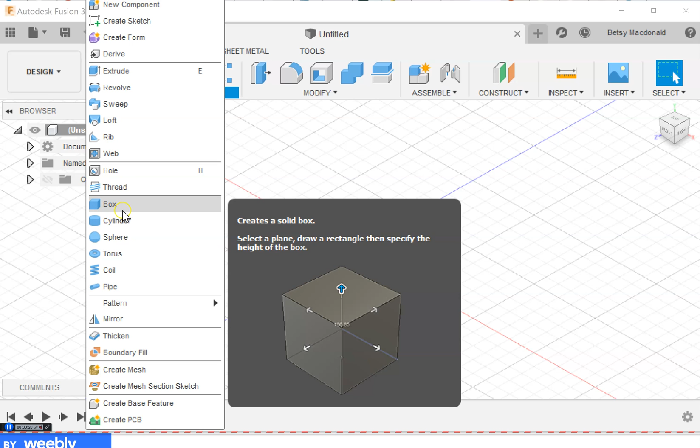Hi, this video is about using the sketch technique in Fusion 360. Sketching allows you to draw lines, arcs, and basic two-dimensional shapes that can then be extruded or pulled into a 3D object.

It differs from the primitives you can make, which is more of a two-step click to creating some basic 3D shapes. In order to use sketches, the sketch mode, you have to create a sketch.

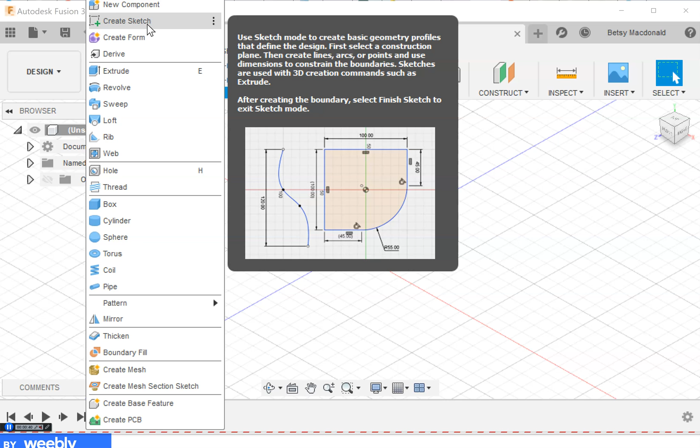This is the quickest way to do it, if you have this create sketch icon. If for some reason that doesn't appear, it's also available under the sketch menu, create menu. I'm going to go back and click this.

As soon as I say I want to create a sketch, it wants to know which plane I'm going to put the sketch on. I typically choose the floor, but it's not all that important in most cases.

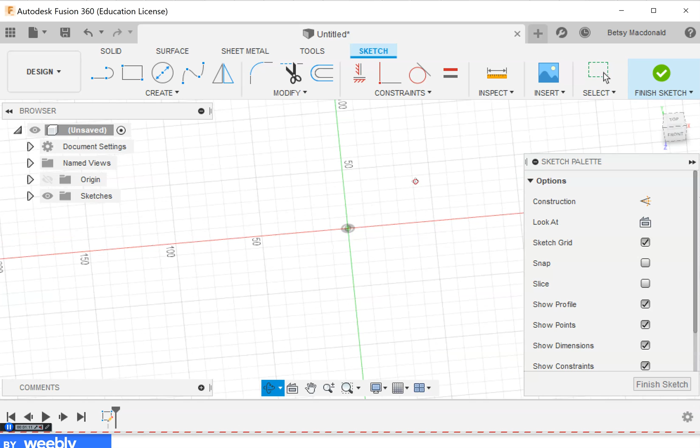After you choose your plane, it will give you a bird's eye view of that plane. You are still able to orbit around, either with this navigation cube, or you can use shift plus the middle mouse button, which will always orbit for you as well. I'm going to go back to top perspective just so I have it nice and neat.

You can see clearly that we are now in sketch mode. There are a lot of different hints. First, the icon bar looks different, showing that we're in sketch mode, and we have an option to finish the sketch. The other thing that's happened is a sketch folder was created, showing us the sketch we're working on. You can have several sketches in a Fusion document.

I encourage you, if you're only doing small models, to try to avoid having multiple sketches. This can happen to beginners because they feel like whenever they need a sketch, they should push this button. But that's not true, because you can open previous sketches as long as you have this browser open and you've expanded your sketch folder in the browser.

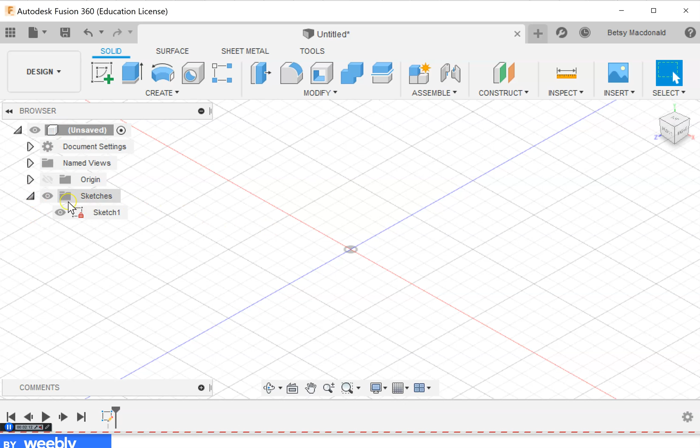So if I want to go back to sketch 1, I can double click it. And now I'm back into sketch mode, and I'm able to draw in my sketch 1.

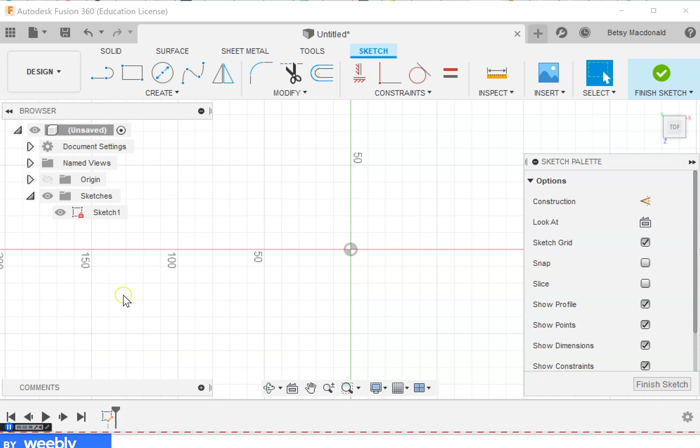The number of sketches you have here can get confusing, because if you want to edit something in the first sketch you made, but you now have 10 sketches, it might be hard to select it, because you basically need to know which sketch layer it's in. So that's important to note.

I'm going to draw a few things just to show you something. So that creates a rectangle, and this creates a circle, and it does it from the center. The spline tool we're not going to look at just yet, nor are we going to look at some of these other tools. I am going to choose the line tool, and I'll do another video specifically on this line tool. But I want to show you something.

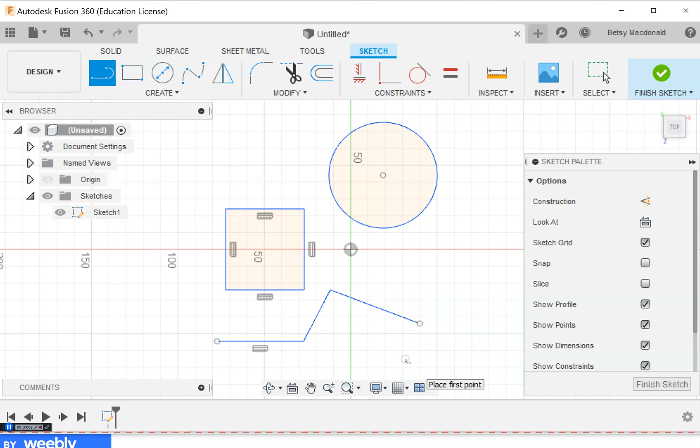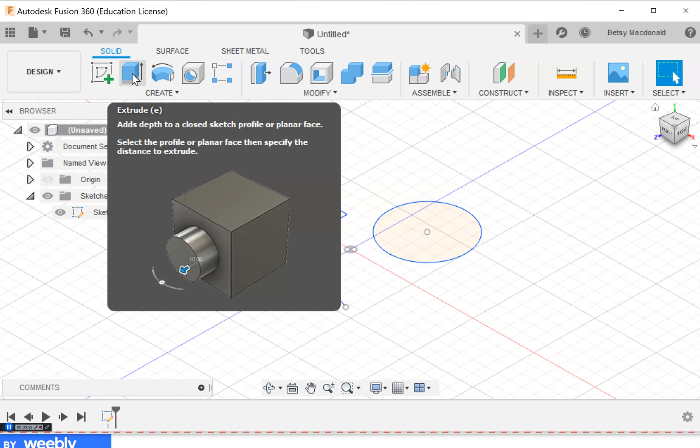If I stop my sketch, that puts me back into solid mode, and two of the options in solid mode are either press pull or extrude. In a lot of ways, and in a lot of cases, they do the same thing. I'll talk about their differences in another video, but for now I'm going to click extrude.

And I can extrude either of these shapes because they have a closed face. So I'm going to click the circle.

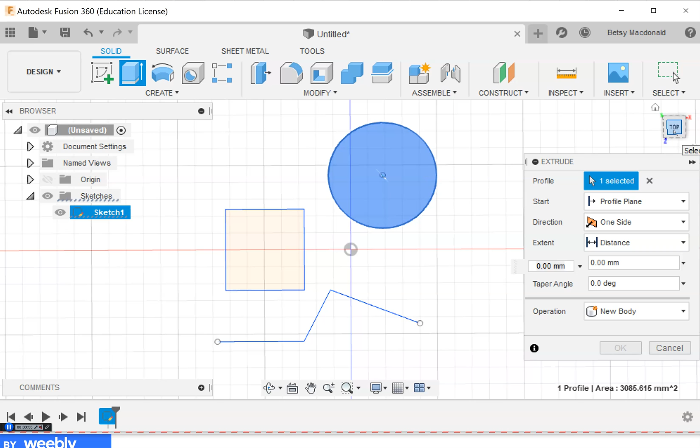One thing I wanted to point out and forgot: if you click extrude and click this, the properties box opens, but you're probably accustomed to seeing an arrow. So when I'm teaching this to my students, I'm actually going to cancel out. If you start in top mode and you click extrude and then click this face, they get a little bit confused because they're used to seeing the blue arrow to pull it up.

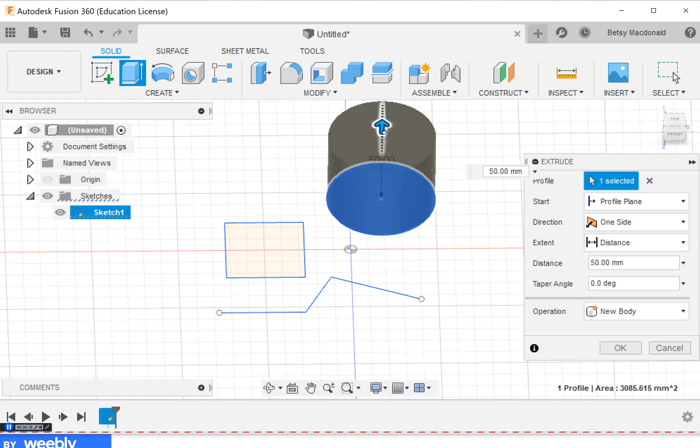It just takes a minute for me to remind them that they have to look at it with not just the bird's eye view. So we can pull it up here. And I can hit enter or click OK to accept my changes, and I'll end up with a cylinder.

Then it looks like I lost the other things I had sketched in sketch 1, but I haven't. They're merely hidden. Whenever you do a modification, a press pull or something, or you create a revolution, some of these other drawings you had in your sketch get hidden.

You can see right here: if my folder is collapsed, it looks like everything's showing. But if I expand this folder, you can see that the other sketch items are now hidden. So we simply have to click this eyeball. In the earlier version of Fusion, it looked like a light bulb instead of an eyeball.

But once you click the eyeball, your other sketches come back. And if you wanted to press, pull, or extrude another one, you can do that.

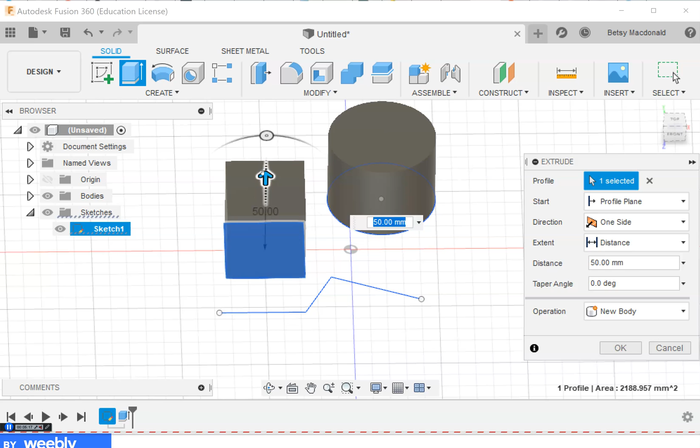So I really encourage you to get used to knowing which sketch you're in and how to get back in if you need to edit it or add another drawing to the sketch.

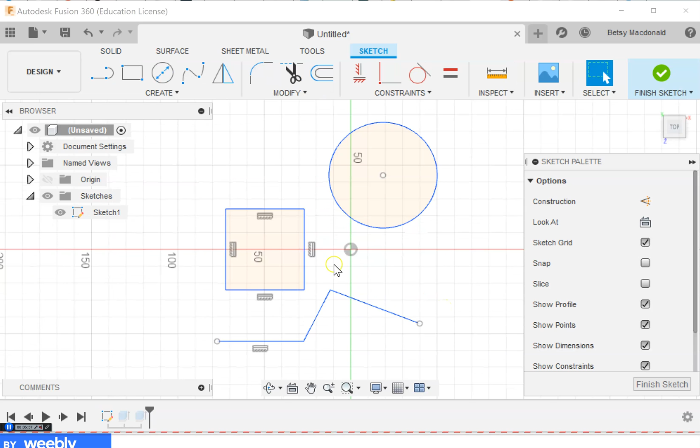Again, if I wanted to do that, if I wanted to change the dimensions of this or something, you can double click the sketch here. That brings you back into what you did.

Then you're able to do some editing, which I'm not going to show you here, but that's sort of the beginning of how sketch looks.

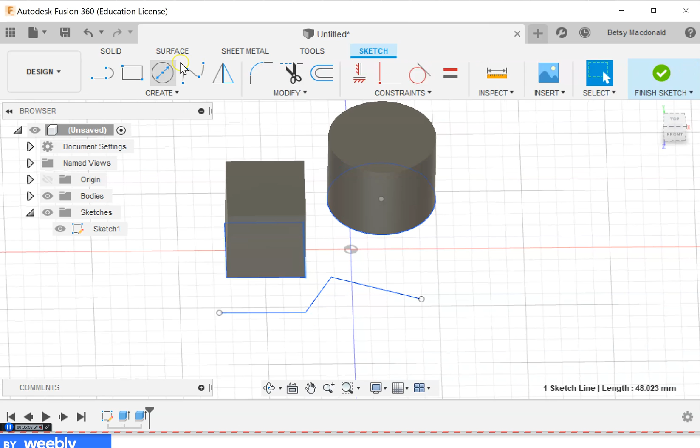So pay attention to the menu bar, know when to finish sketch and when not to finish sketch. And when you do finish sketch, remember that it brings you back to solid mode, and you can hide and show your sketch in the browser.

So I hope that helps as an introduction to sketches.